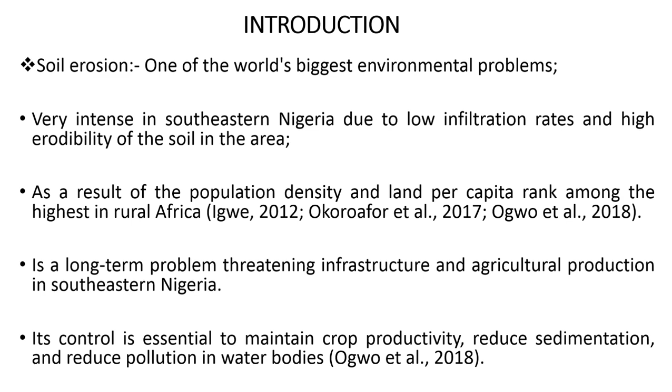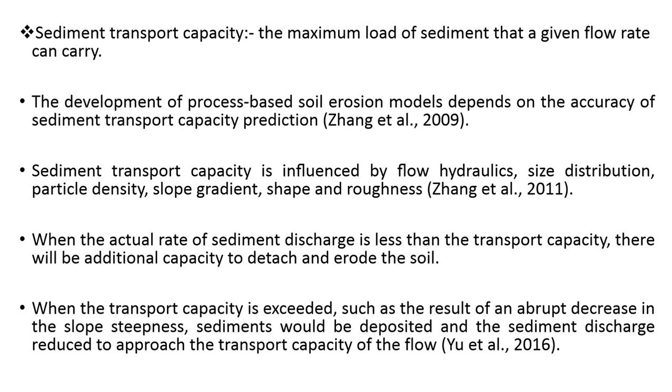Sediment transport capacity is the maximum load of sediment that a given flow rate can carry. In order to develop process-based soil erosion models, there is a need for accurate prediction of sediment transport capacity. Sediment transport capacity is influenced by flow hydraulics, sediment size distribution, sediment particle density, slope gradients, shape and roughness. When the actual rate of sediment discharge is less than the transport capacity, there will be additional capacity to detach and erode the soil. But when the transport capacity is exceeded by the sediment load, sediment would be deposited and the sediment discharge reduced to approach the transport capacity of the flow.

This work is justified in the sense that accurate prediction of sediment transport capacity is a key to the development of process-based soil erosion models. Sediment transport capacity plays a crucial role in the physical explanation of soil erosion processes. Therefore, this work will be used to know the effect of slope gradient and flow rate on sediment transport capacity, which helps to predetermine erosion prone areas if the slope gradient and flow rate of an area are known.

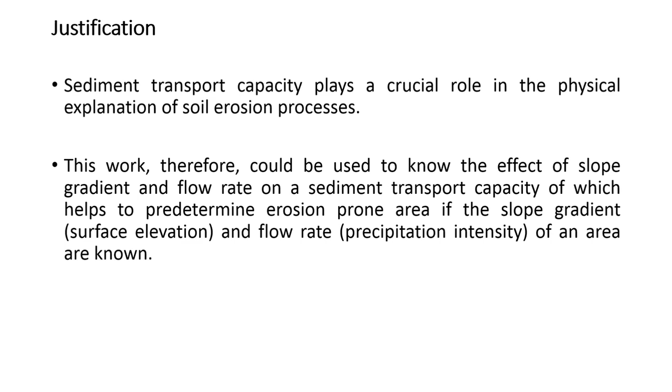The main objective of the project is to determine the effects of slope gradient and flow rate on concentrated flows in an erodible bed. The specific objective is to determine the influence of slope gradient and flow rate on sediment transport capacity by using 40 combinations of 5 flow rates and 8 slope gradients.

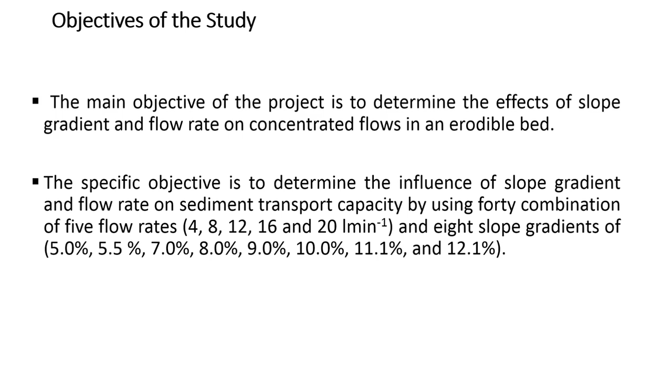Methodology. The soil sample was sourced from a cultivatable layer of 30 cm depth. The soil sample was air dried and sieved through a 4 mm mesh. The soil sample was packed into the experimental flume layer by layer with the use of wire gauze to facilitate even drainage of the percolating water. Each packed layer was 9 cm to get 4 equal portions, which accumulates to a depth of 36 centimeters. After packing, the soil was soaked with water until surface flow occurred by using a watering can to further reduce the variability caused during packing.

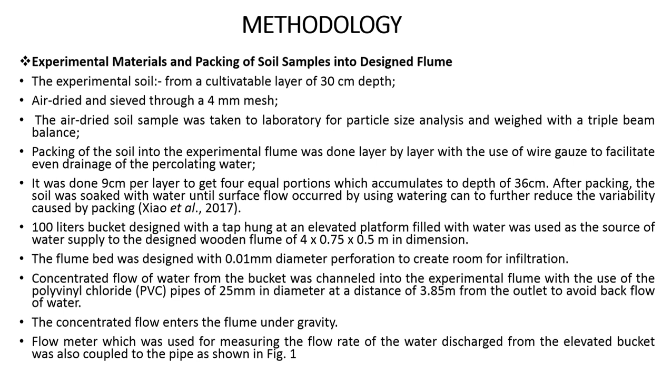A 100 liter bucket designed with a tap, hung at an elevated platform and filled with water, was used as the source of water supply to the designed flume. The flume bed was designed with 0.01 mm diameter perforation to create room for infiltration. Concentrated flow of water from the bucket was channeled into the experimental flume with the use of PVC pipes of 25 mm in diameter, and the concentrated flow enters the flume under gravity. A flow meter was incorporated into the design in order to measure the flow rate discharged from the elevated bucket. Figure 1 shows the experimental setup.

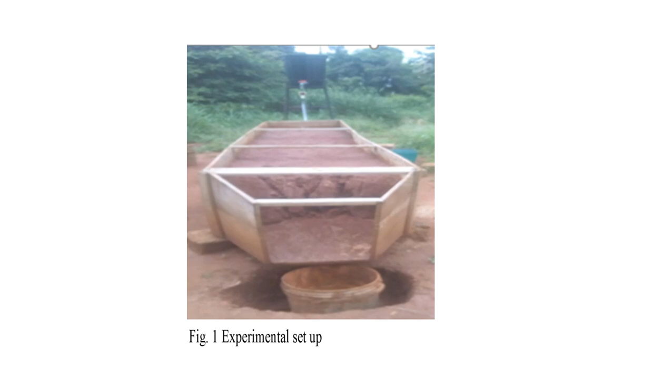The experiment lasted for 5 minutes following the initiation of runoff, which was collected in a series of 5 plastic containers at 1 minute intervals over a 5 minute period. The sample was decanted after 24 hours and taken to the laboratory for gravimetric analysis. A hydraulic jack was incorporated into the design to enable slope change. Dye was used to determine flow velocity. As the fluid moves, the dye was sprinkled on the surface of the flowing water at a marked point. Then a stopwatch was used to observe the time it took to cover the distance. Flow velocity is determined as in equation 1.

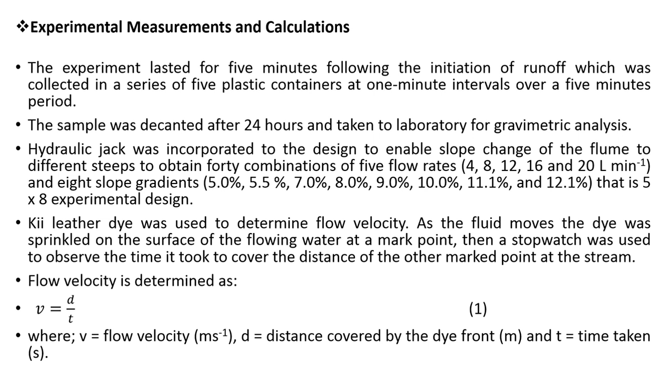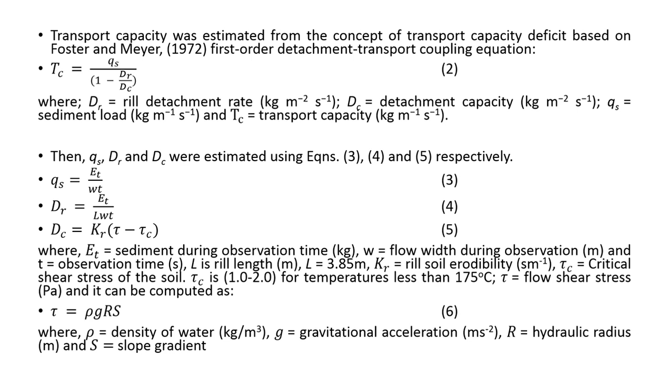Transport capacity was equally estimated from the concept of transport capacity deficit proposed by Foster and Meyer, the first order detachment transport coupling equation, as in equation 2. Sediment load rate, detachment rate, and detachment capacity were all estimated using equations 3, 4, and 5 respectively.

Results and discussion. Figures 2 and 3 show that sediment transport capacity increases with the increase in both slope gradient and flow rate respectively. It was observed that there was always a slight increase in sediment transport capacity for gentle slopes in the range of 5% to 12.1% at different levels of flow rate. The results showed that the relationship between sediment transport capacity of concentrated flow and slope gradient as well as flow rate can be described by power functions with R squared greater than 0.885 and exponential functions with R squared greater than 0.843 respectively.

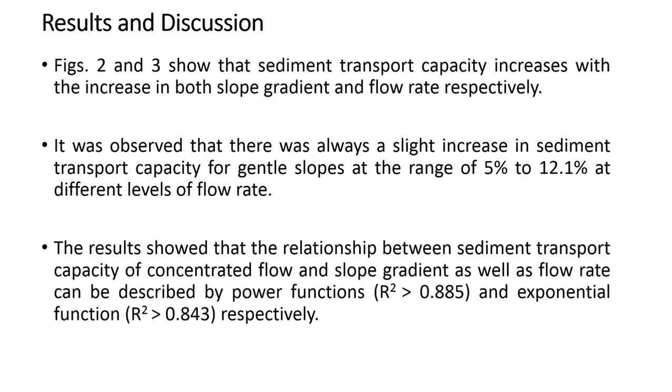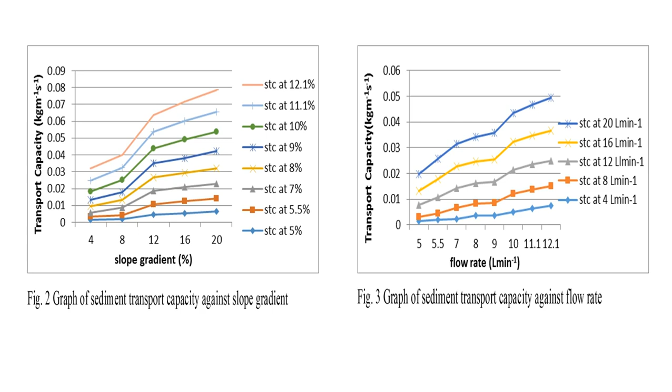Figure 2 shows the effect of slope gradients on sediment transport capacity. We can see that at gentle slopes, there is a slight increment in sediment transport capacity, but the steeper the slope, the more increment in sediment transport capacity. While figure 3 shows the effect of flow rate on sediment transport capacity, and there is a stronger response of sediment transport capacity to increase in flow rate than it does to slope gradient.

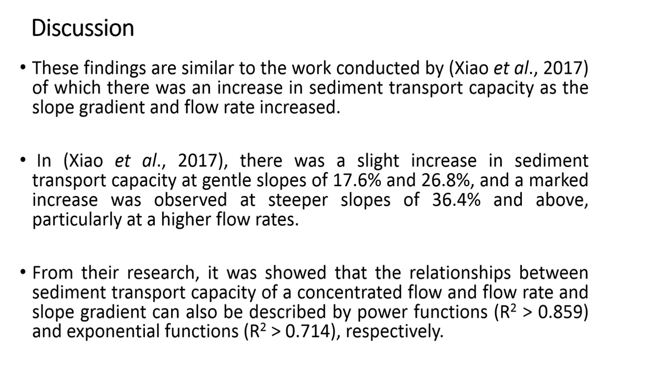Discussion. These findings are similar to the work conducted by Xiao et al. 2017, in which there was an increase in sediment transport capacity as the slope gradient and flow rate increased. In Xiao et al. 2017, there was a slight increase in sediment transport capacity at gentle slopes of 17.6% and 26.8%, and a marked increase was observed at steeper slopes of 36.4% and above, particularly at a higher flow rate. From their research, it was shown that the relationships between sediment transport capacity of a concentrated flow and flow rate and slope gradient can also be described by power functions with R squared greater than 0.859 and exponential functions with R squared greater than 0.714 respectively.

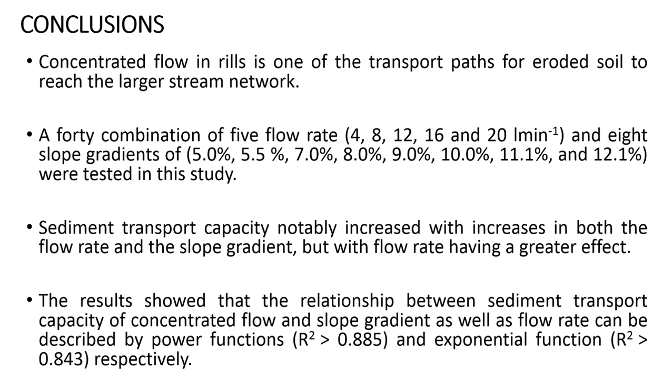In conclusion, concentrated flow in rill channels is one of the transport paths for eroded soil to reach the larger stream network. Forty combinations of 5 flow rates and 8 slope gradients were investigated in this study. Sediment transport capacity notably increased with increases in both the flow rate and the slope gradient, but with flow rate having a greater effect. The results showed that the relationship between sediment transport capacity of concentrated flow and slope gradient as well as flow rate can be described by power functions with R squared greater than 0.885 and exponential functions with R squared greater than 0.843 respectively.